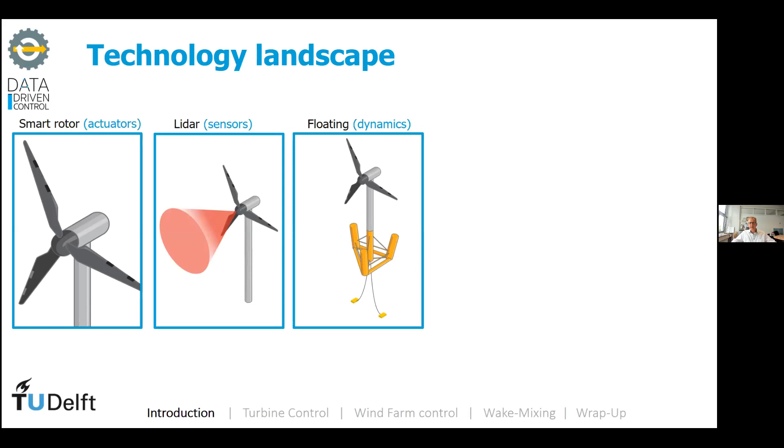Then we have floating, which I believe is the main topic of this workshop this week, and I will also place it in perspective for smart wind farms. From a control point of view, why are floating turbines so interesting? Because of the dynamics. If you install a baseline controller on a floating turbine, it will become unstable in the above rated region. So it's really interesting to study the dynamics, and maybe you can do more with it if you look at wind farms.

Wind farms, why is it interesting from a control point of view? Because of the scale and the nonlinear dynamics and the time varying conditions, and you name it. And of course, there are multiple other technologies you can also look into.

The point I would like to make with this slide is that these are technologies, and it's also the interfacing with the controller. The controller is basically saying what an actuator should do, and the controller is using sensor information. So in the case of smart rotor, you can think about distributed control algorithms. In the case of LiDAR, you can think about feed-forward control. In the case of wind farms, you really can think about distributed estimation, distributed control.

But what I also believe is that if you develop control algorithms for wind turbine applications, wind farm applications, you really have to tailor these algorithms towards the application and really use properties of the system when you design your control. And we also believe that you have to use data to design your controllers and update your controllers.

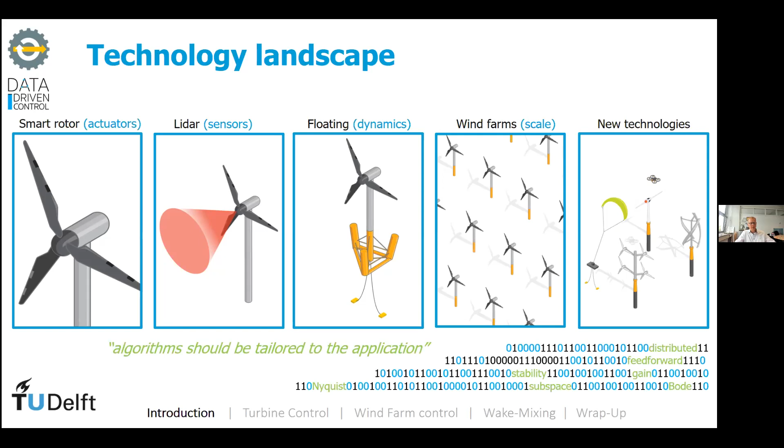So that's also the philosophy that we have in my group, is to develop data-driven controllers. So how do I design our controllers? That's basically given on this slide.

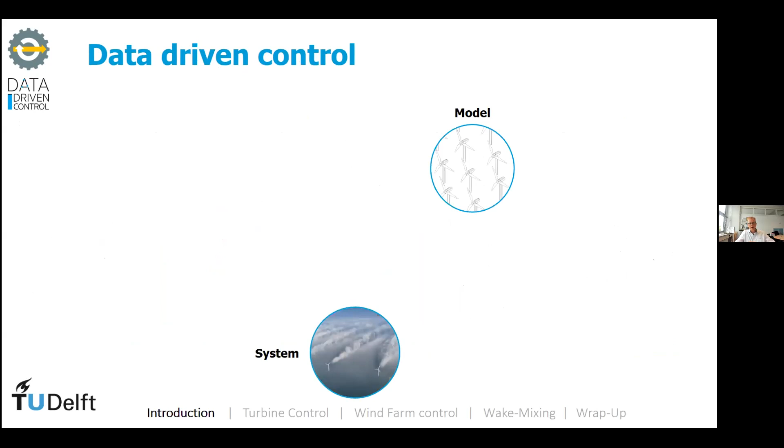We have our system, which can be a wind farm - that's something I do in this talk today. It can also be a wind turbine. And then we typically build a first principle model, which is basically given over here. But a first principle model doesn't capture all the dynamics of a real wind farm or a real wind turbine. So what we believe is that you always have to augment your model with measurements. And that can be really simple - it can be through Kalman filtering, but it can also be machine learning or whatever. But we believe that you always should merge first principles with data and not full black box modeling.

And then we have the model, and then we do controller synthesis. A controller is nothing than a computer code, right? So it's just zeros and ones. And what we try to do is always implement - that's something I'm also going to show for smart wind farms.

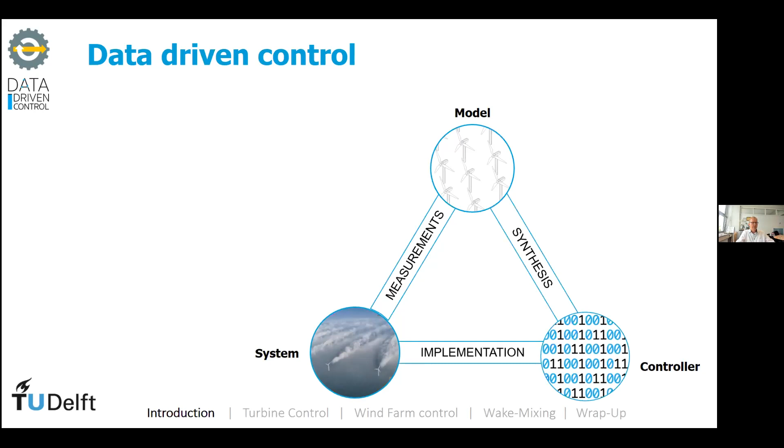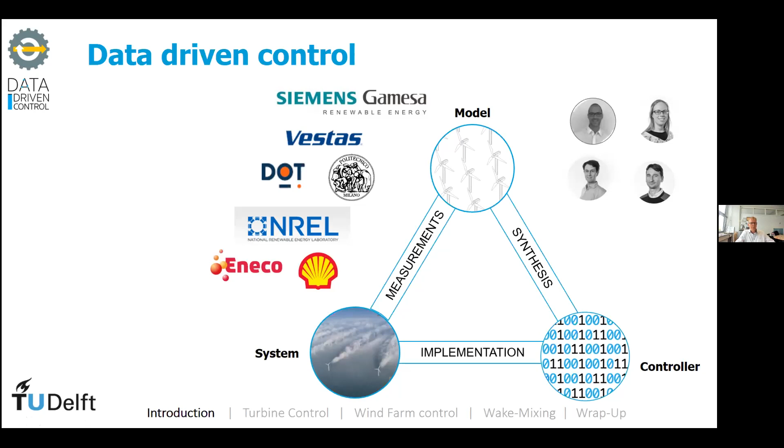So working on this cycle, that's something we do in our group, and we do that together with different companies like Siemens Gamesa, Vestas, Eneco, Shell, and also we work closely together, especially in the field of wind farm control, with NREL. And we do that with a bunch of PhD students and postdocs, which you can see over here. So the rest of the slides that I'm going to show are also made by some of them - that's a small disclaimer from my side.

So data-driven control, that's how we try to approach it. Now, data-driven control can be done in different ways. You can do this fully adaptive, that your model is updated online, but you can also do it batch-wise. You just build your system, you do modeling with SysID, system identification, then you design a controller, and then you implement, and then you're done.

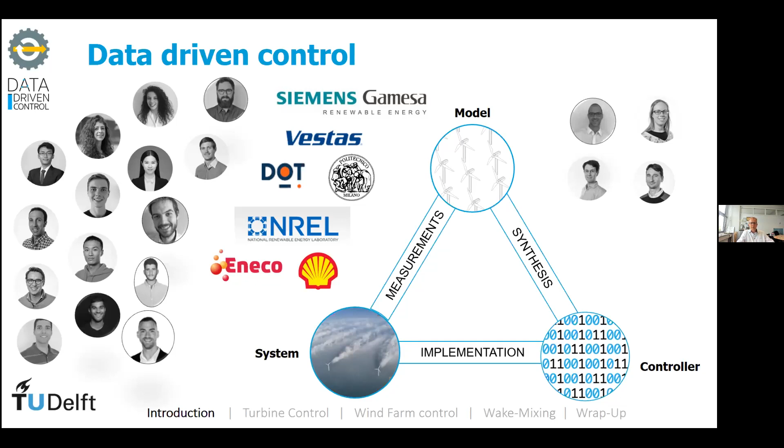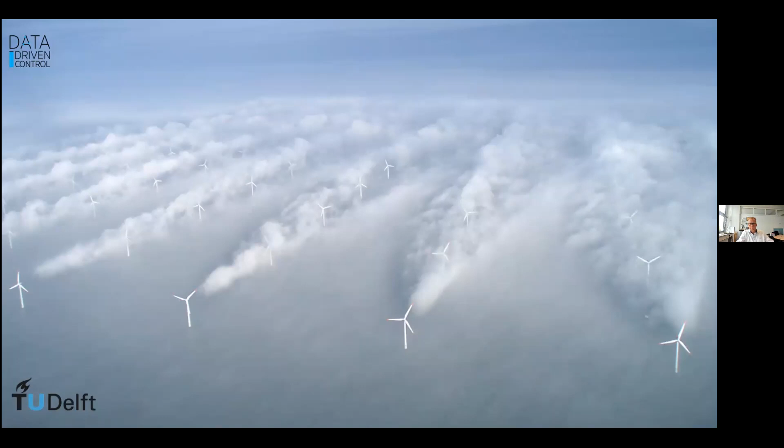So now let's go back to the wind farm, and let's try to apply data-driven control and also different control technologies on the wind farm problem. So of course, the main objective is to get more energy out of the wind farm, but also taking into account that we don't want to increase the loading too much on the individual turbines.

So can we do something about it? Can we not state, hey, let's try to put this turbine somewhere else, right? And of course, you have to do it for different wind directions and wind speeds, and you name it. Is that possible? For existing wind farms, no. But maybe in the future, since you only have to reposition with a diameter or so, maybe that will be possible. Think about the different floating concepts that are out there.

Still, this is of course far in the future, but think about the flexibility that you have. If you can do that, the potential is huge because you're fully, you don't have the wake effects anymore - if you can do this in a perfect way. So that's 20% higher energy yield. So that's a prediction.

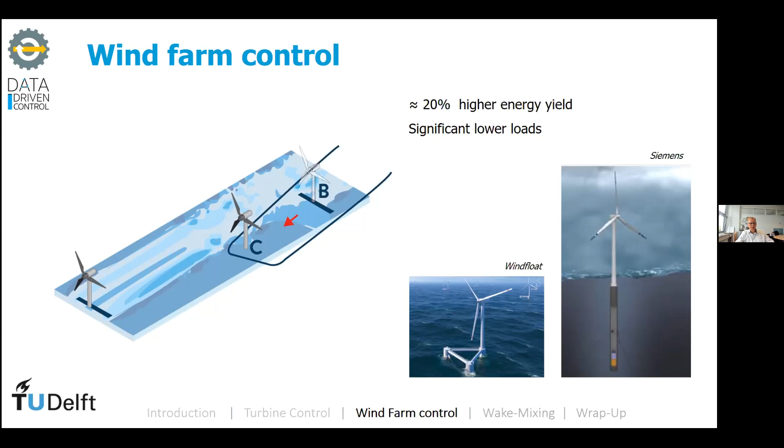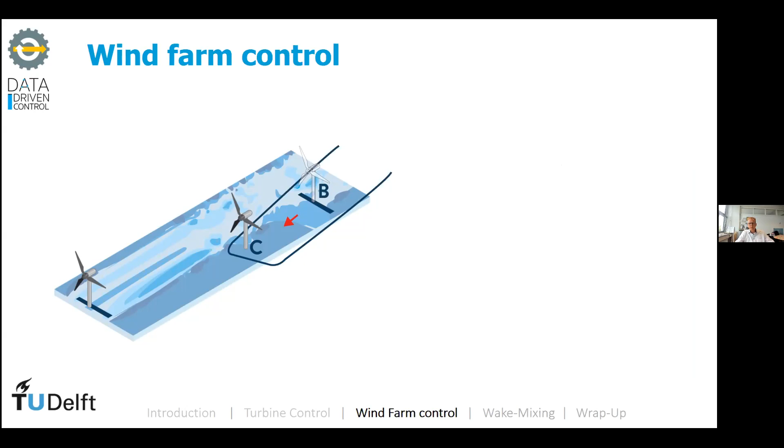But what's important here to mention is that it looks so easy, right? We see the wake in this picture, we have seen the wake on the photograph, but in reality we don't have that information. We don't have access to the flow information. So the only thing that we have is measurements, on a turbine level.

So what we have to do if we want to do wind farm control, and maybe this repositioning, you have to reconstruct the wind field. Then if you have the wind field, you have to predict what's going on, and then you have to optimize. That's the big control challenge, I would say. And then you can do repositioning, but you can also use already existing control technologies on a turbine to maximize the energy capture and or to reduce the structural loading in the wind farm.

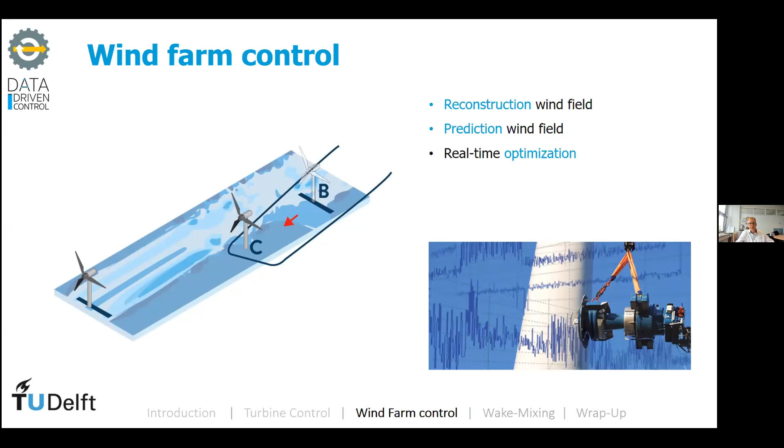Now, recent results basically show that actual induction control doesn't work. The energy that you let go is not picked up by all the other turbines. This is shown in field experiments, but also wind tunnel experiments. While if you look at really simple models, the potential is huge for induction control, high fidelity wind tunnel and field testing shows that for induction control, there is a really limited benefit.

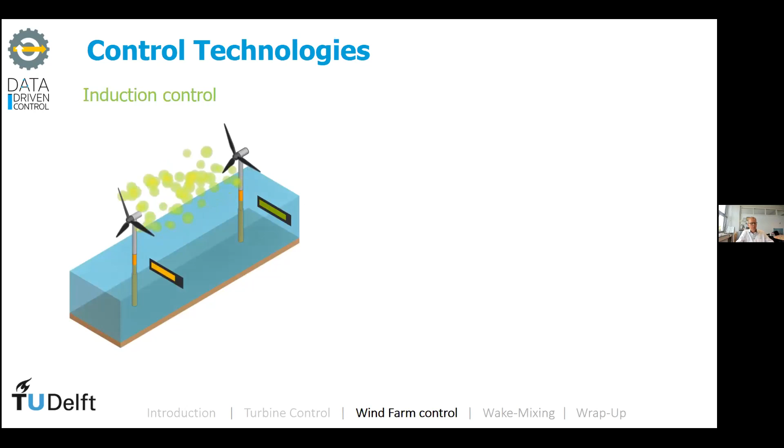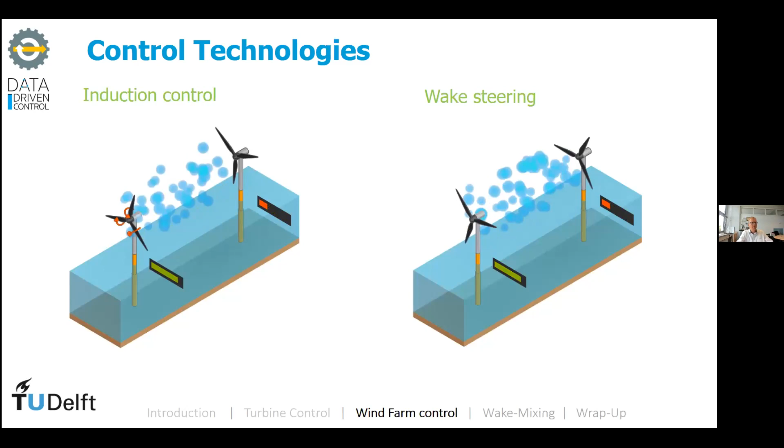This technology seems to have a lot of potential in wind tunnel experiments, high fidelity simulations, and field experiments. One example is a simulation that you see over here. This is also something you can see as a state of the art. So you see here two CFD simulations.

At the left, you see the baseline. And at the right, you see the optimized setting. The optimized setting meaning that we had a first principle model, in this case the FLORIS model, developed together with Jan-Willem. And then we optimized the optimal yaw settings. And what you nicely see is that we can do wake steering.

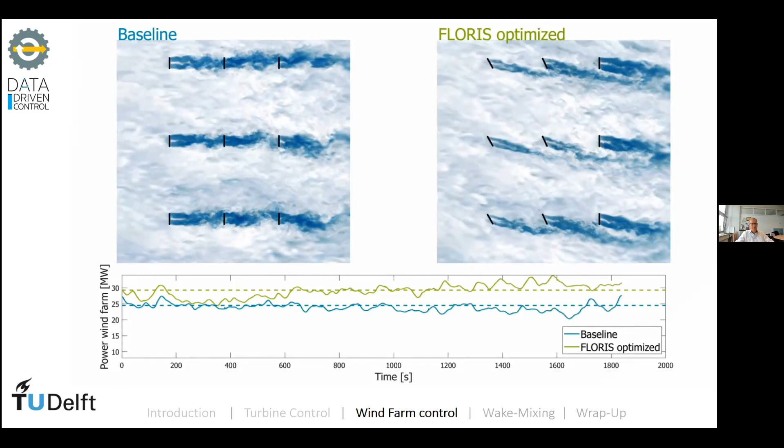Now, in the graph below, you can also see the potential and the amount of energy that you can now extract out of a wind farm. Of course, this is a high fidelity simulation, and still what you see is that the wind conditions are more or less steady, right? It's the same inflow direction, and also the turbulence intensity is more or less the same.

So we believe that if you really want to apply wake steering in a wind farm, you also have to make it more robust with respect to time varying conditions. So what we are doing, and we also did that in European projects and also now some national projects, we look at closed loop wind farm control, also taking the dynamics into account. So what do I mean with closed loop? Closed loop is looking again at the system, and then we also look at time varying conditions.

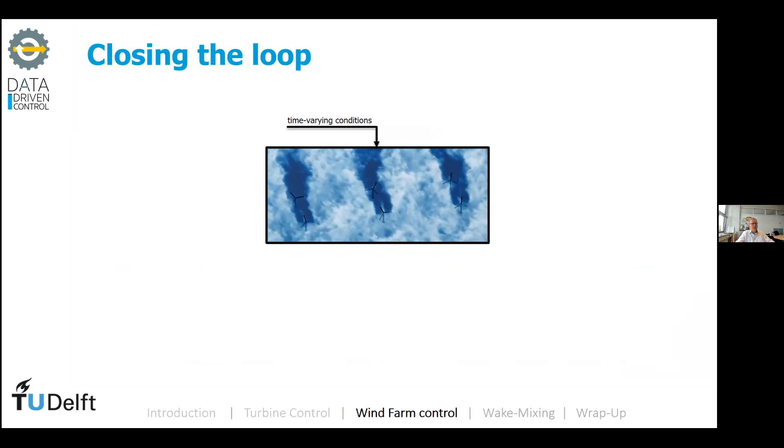So in this animation, so SOWFA simulation, you see that the wind direction is varying. And of course, we know that we have certain control inputs. So this can be induction control, wake steering, or maybe in the future repositioning.

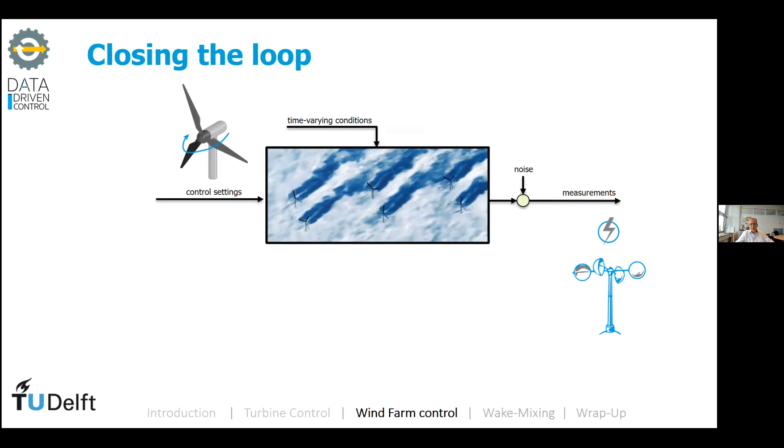Then we have measurements. And please remember that measurements are typically always corrupted by measurement noise. This can be power measurements, load measurements, or the wind vane on top of the turbine. And what we believe is that we should use this data and combine it with our internal model, which can be the FLORIS model, but it can be a 2D CFD model or another model, and adapt the model accordingly. So again, I'm coming back to our data-driven approach.

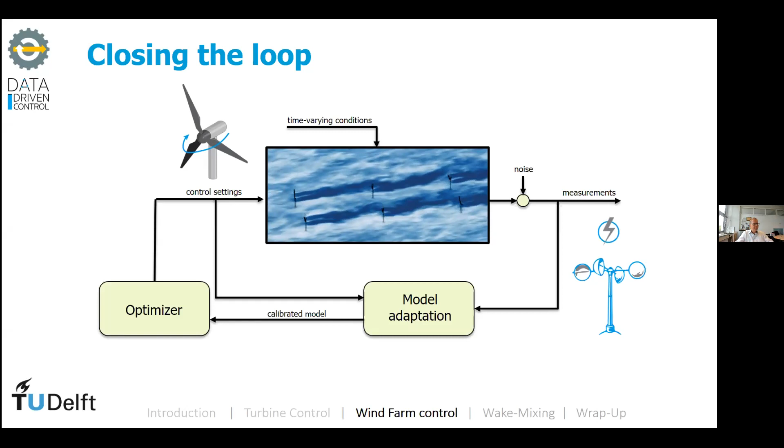This model is then fed to an optimizer, and the optimizer decides over a receding horizon what it will do. So we're basically using the MPC principle. Now, what you see here is basically then again the controller.

And the result that you see is one of our latest publications in this field, where we put the Floris model in a closed loop setting, and then we test this for time varying conditions. So that's also the work done with Bart Doekemeijer.

So yeah, that's closed loop. So what I believe is essential here is that you look into the dynamics of the wind farm. And I really believe that's the next step. And that's where we can also use control theory.

Still, I'm talking here about using steady state control inputs like yaw misalignment or induction control or repositioning, which is all extremely slow. Our recent hobby in our group is also to look at dynamic actuation. And that's basically the next topic I would like to address. And that's wake mixing. I will also try to make the link again with floating wind.

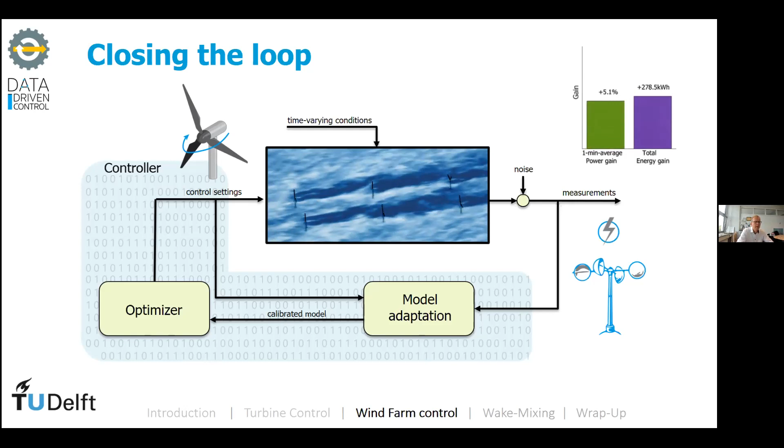So wake mixing, and then I would like to look into dynamic actuation. So what do I mean with dynamic actuation?

If you do induction control, you basically derate your turbine. So you have an offset, for instance, in your pitch, or you change your generator torque. Now let's use pitch. So you basically pitch out the blades a little bit, and then you'll lose some energy, and you hope that the downstream turbines will pick up that energy.

As stated before, in steady state, that doesn't work. But what will happen if we do this in a dynamic fashion? So what will happen if we do dynamic pitch, for instance, sinusoid on the pitch?

And think about really low frequencies, a frequency around 0.2 Strouhal for a 10 megawatt turbine. That's a frequency of 0.01 hertz, order of magnitude. So we call that the pulse. I will give an animation later on about the effect.

And that's the innovation also from our group, is to do this in a different way, is to use individual pitch control. So I didn't explain individual pitch control, but individual pitch control is typically used for load mitigation. But if you apply it in a certain way, then basically you can also try to steer the wake.

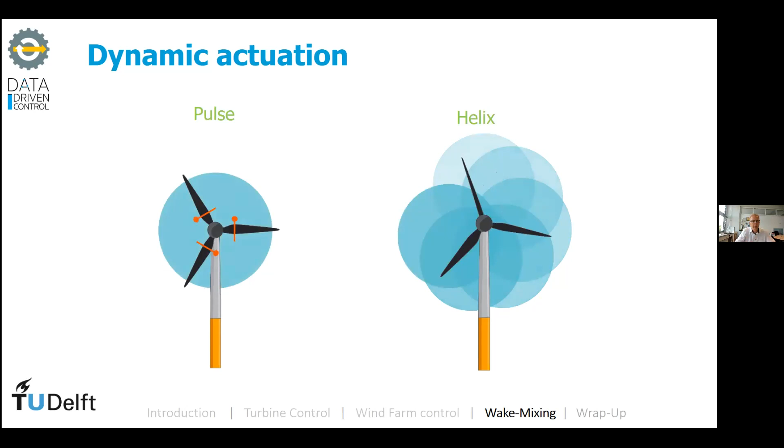And then the wake will get some kind of helix shape if you do the pitching in a certain way. So that's again explained here. So the pulse, we just put a low frequency sinusoid on the individual pitch angles. And the helix, then there are a little bit of details about individual pitch control.

You basically put a low frequency sinusoid on the tilt and yaw degree of freedom of a turbine. If you do that with the MBC transformation, you get the 1P pitching plus or minus a certain frequency. I'm not going to talk here about the details. There are some nice papers written about this.

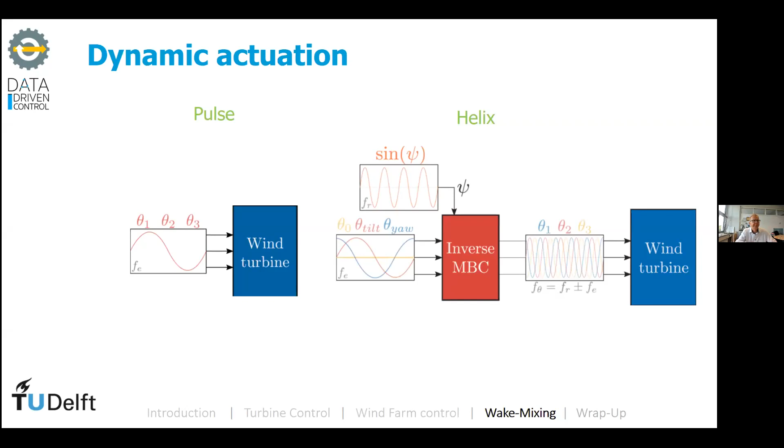So the point here is, can we do something with dynamic actuation? And then of course it's yes, because otherwise I wouldn't show you the results. So here again, a SOWFA simulation with uniform inflow, with a single turbine, 10 megawatt turbine.

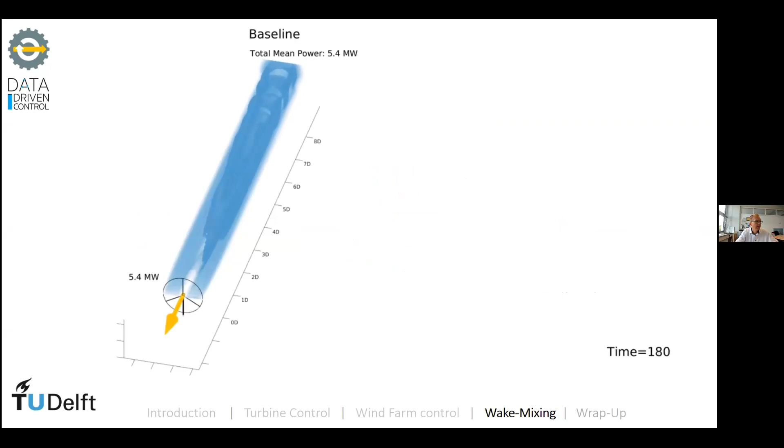And then here, the second one, you see the pulsing. So if you do pulsing, you see that you get wake mixing, and you also see that the power on the first turbine fluctuates a lot. And that makes sense because we're doing this collective pitch.

And then we also have the helix. And with the helix, we do individual pitch control. And in principle, we don't touch the collective pitch part. So that also means that the power will stay the same on this turbine. And what you nicely can see is that also the wake gets a helix shape. So that's fantastic because we also have more or less the same amount of wake mixing.

And here you see the full potential if we put a turbine in the wake. If we now have a turbine in the wake, you see that we go from 6.1, 7.2, 8.2 megawatt if we have full wake interaction. Of course, this is the perfect scenario, uniform inflow, but we have shown that also with turbulent inflow, there is a gain for this technology.

And we're now also exploring this further in national projects, and we're also going to do some field testing of the different technologies presented over here. So that's wake mixing. I know that Daniel is also going to talk in this session, but I'm going to do a spoiler alert a little bit.

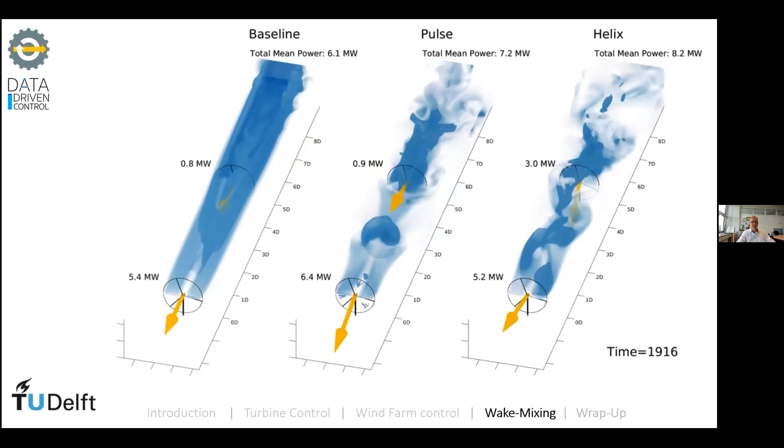What will happen? Oh, that's later on.

So part of this technology, this wake mixing, the pulse, we already tested in our own wind tunnel because we always believe it's important to also test our algorithms, either in real life or in a wind tunnel. So we use the Open Jet facility here in Delft.

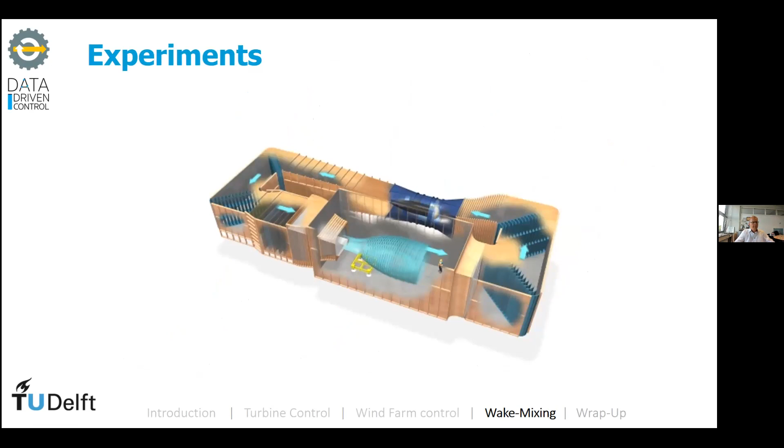Here you see a person standing in the wind tunnel, so you get an idea of the size. We did some PIV measurements, so we have this bubble seeder. We have a small turbine, and a couple of these small turbines to do wind farm studies. So we have 4 of these small turbines, diameter 60 centimeters.

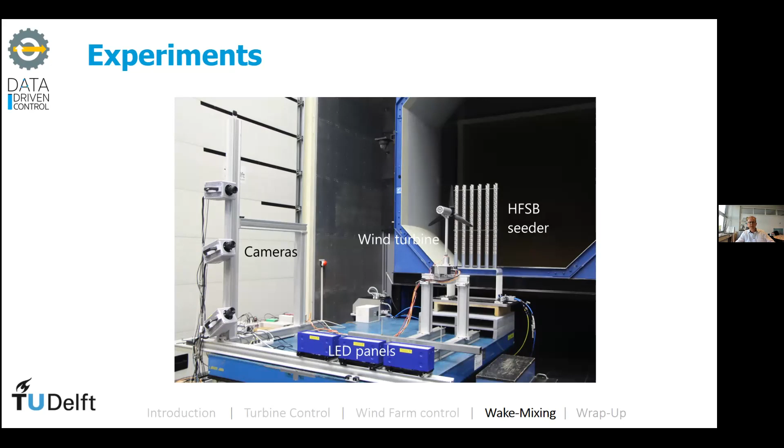And what we did is we changed the pitch, in this case only collective pitch. Now if we do that, and you just put a video recorder in your wind tunnel, you get these kind of images, and here you nicely see the pulsing, also in the wake.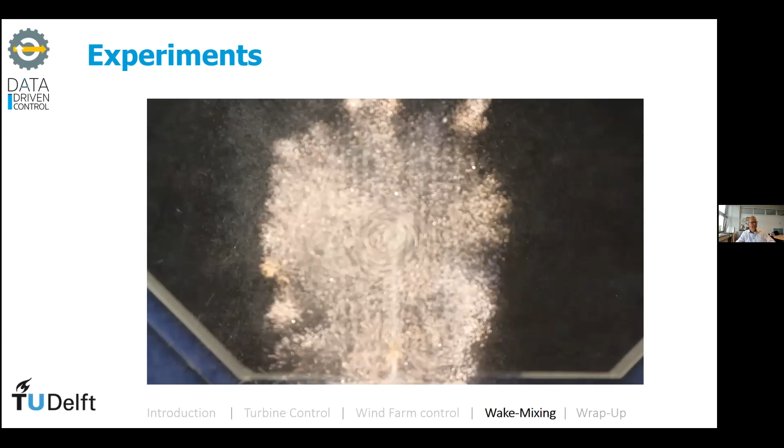And if you then do the PIV analysis, this is the work of Daan van the Broek, I forgot his last name, you get these kind of images. So what you see here is again the measured pulsing, and what you nicely see is that you get the wake mixing. So the wake mixing we have seen in high fidelity simulations, the concept, it's real.

It's also going on in wind tunnels, and we have done something similar in the wind tunnel in Milan, part of the European CL-WINDCON project. And then we also put a second turbine in the wake, and again we showed some benefits of this wake mixing. So here's a spoiler alert, I'm going to be quick here because I think I have an hour in total.

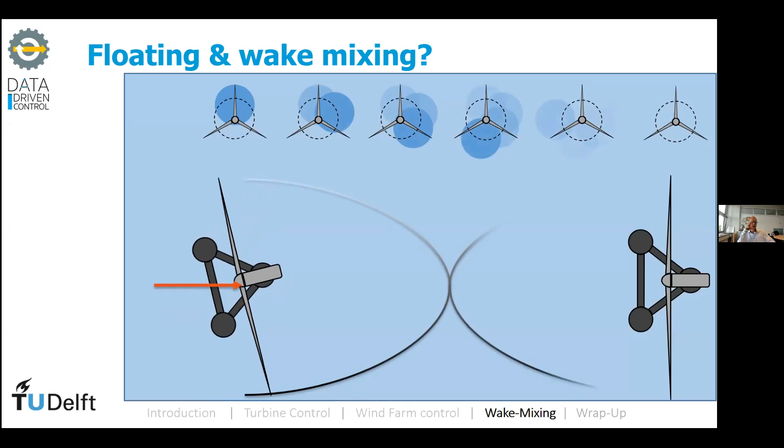So can we also use floating turbines to enhance wake mixing if you also do something with pitch? Daniel will give you the details, but if we, for instance, do it with the helix, then you can imagine if you apply the helix and also yaw and tilt moments on your rotor, you also get a natural movement of your turbine. Now you can do this for the helix, but Daniel is also going to talk about the pulse.

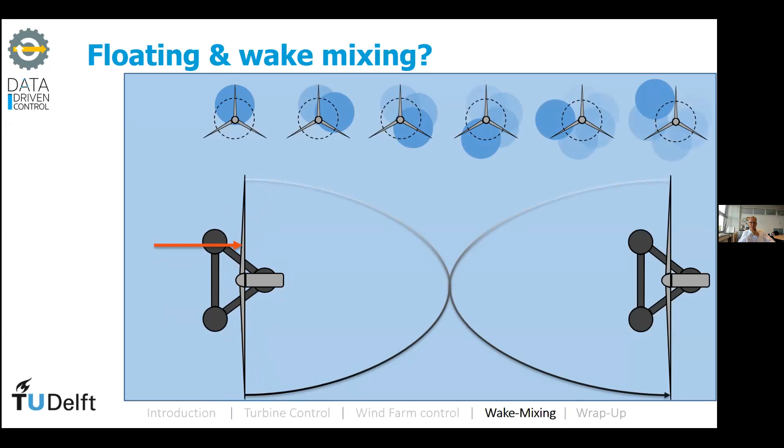You get something similar, and the main advantage would be that the amount of amplitude you need for your pitch can probably be reduced. And that's what we see over here. So similar animation as before: baseline with 2 turbines, helix 1P with 4 degrees amplitude of the pitch, and then here we see the floating implementation, where we only have 2 degrees of the pitch, and more or less the total energy gain is the same.

So what I'm saying here is that we can exploit the dynamics of a floating structure also to get a little bit of wake mixing for free. And that's something we're also now exploring, part of a European project called FLOATECH, which started earlier this year, where we look at wake mixing techniques for floating structures and also looking into wave feed forward.

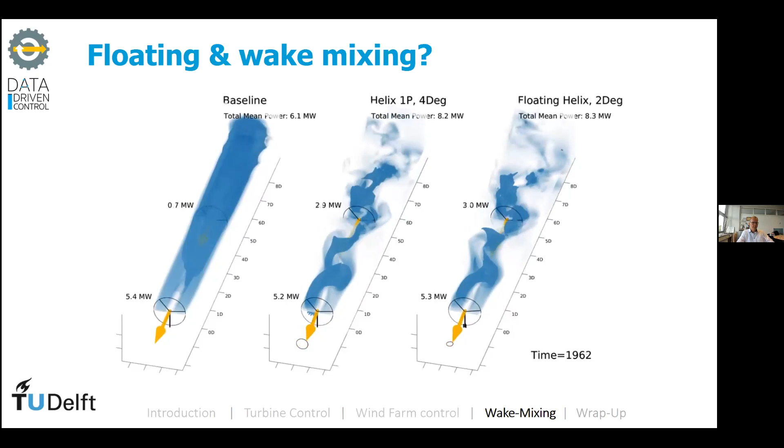So yes, the take home messages, and then we have time for questions, is data-driven control—that's the philosophy that we have, the synergy of combining data with models. So not fully black box and also not fully relying on models. I believe it's really the way forward to do control of complex systems, especially if you look at wind farms. And I also would like to say this is more than just applying machine learning, because it's really also taking the physics into account.

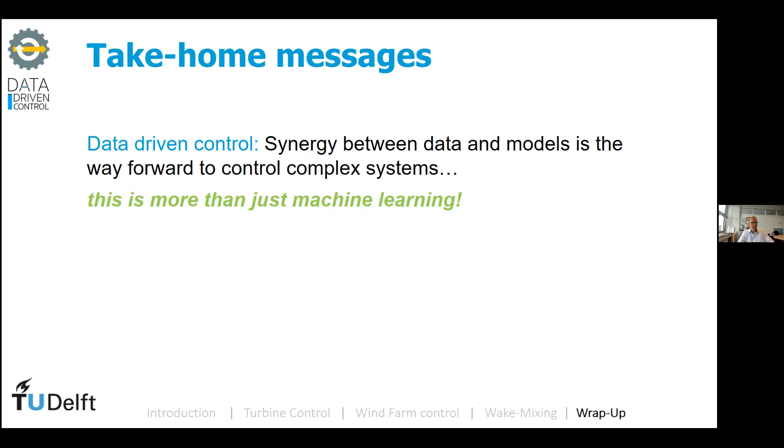And if you look at smart wind farms, I've only talked about some of the technologies we're working on. There are so many new technologies that lie ahead of us, especially this wake mixing, which is one of our favorite hobbies at the moment.

And I dare to say that wind turbine control and wind farm control is now really becoming control of high-tech systems. This is basically the summary of the work we are doing in Delft within my group. We're working on floating wind farms, where you might have these smart actuators even on the blades to do something about load mitigation.

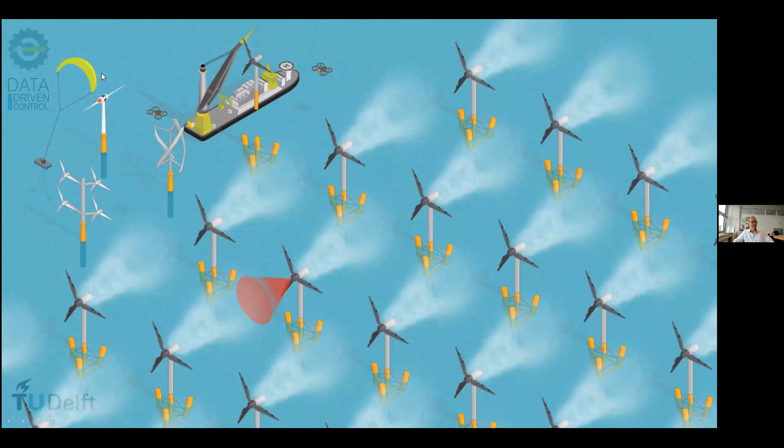You can have LiDAR. We're also looking into floating installation, and we're always interested in novel concepts, so that's why you also see that at the top left. But the most important thing that we do is we build the algorithms around it, because having an actuator, having a sensor, that is not sufficient. You have to add the knowledge, the intelligence behind the system.

And then again, we talk about the zeros and the ones and the algorithm development. That's basically the field of systems and control, and that's what we are doing. I think we will see more talks in this session related to this topic. And I believe I'm exactly within time, so thank you very much for your attention.

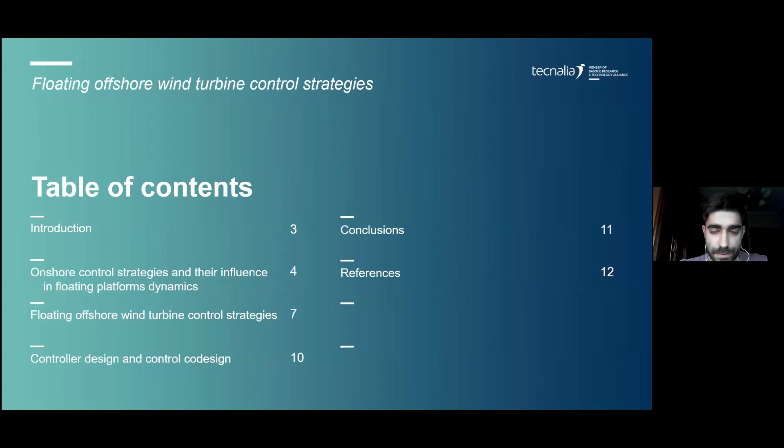What is TWIND? TWIND is a project where a consortium of 4 different entities create a network of cooperation to impulse offshore wind energy research and industry in Portugal. Thanks for the opportunity to be here presenting this topic.

Moving to the presentation core, let me explain how a wind turbine works. The control strategy describes how the turbine is programmed to approach, in a steady state, the ideal power curve. Commonly, commercial wind turbines allow variable speed and variable pitch operation. The control schemes and objectives are different for each region.

In region 1, the wind speed is too low to produce electrical energy and the turbine is kept in standby. In region 2, below rated wind speeds, the turbine starts producing, so the control objective is to maximize the output power. In this region, the blade pitch angle is usually kept constant at a value and the generator torque is controlled.

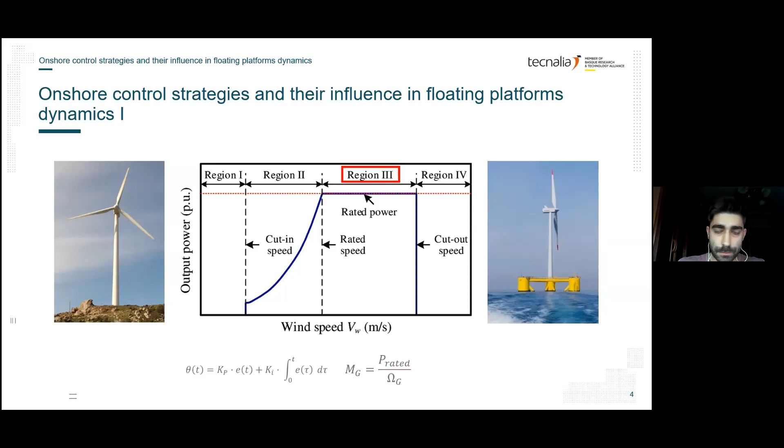In region 4, the wind speed is too high to produce energy safely, so the wind turbine is shut down. For floating systems, the challenge appears for wind speeds above rated value, precisely in region 3. The previously presented strategy generates instability when applied to a floating system operating in region 3. So there's a problem with the wind turbine controller.

A typical wind turbine employs a pitch-to-feather strategy to control the power output. When the wind speed increases, the blade pitch angle also increases to reduce the thrust force, as can be seen in the figure. In a floating system, the thrust force is a damping force for the system motion. When a change in wind speed causes a positive change in thrust force, the damping is positive. But when it's negative, negative damping is introduced to our system, increasing the motions. This negative change in thrust force can be seen when operating in region 3.

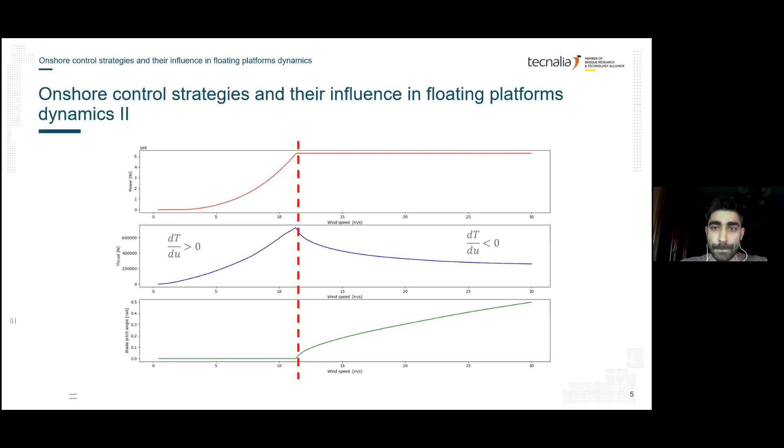So why is this a problem for the controller? Assume an increase in wind speed. The platform pitches with the wind and the aerodynamic torque increases, so the pitch angle needs to be increased to maintain power at the nominal value. In this case, the thrust force is reduced, so we are in a negative damping situation.

Now assume that the platform pitches toward the incoming wind. The only way to stabilize the platform is to create a restoring moment using the thrust force, so we need to increase the thrust force by reducing the pitch angle. Both control objectives are competing to control the pitch action in region 3. This is an undesirable phenomenon that increases the loads and reduces the power performance in floating wind turbines.

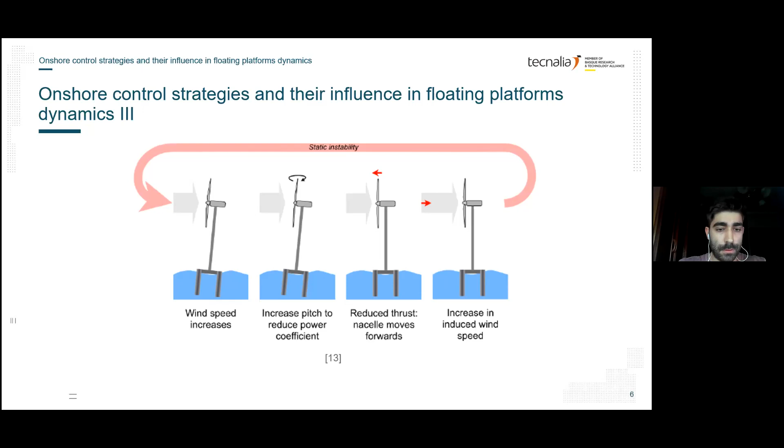So how can we control this and reduce loads? First, using the wind turbine control. Different complexity level controllers can be designed to solve this.

In a first level, we can use the same SISO control that keeps the basic control structure. The difference between this and the previous explained control is at the tuning of the control gains. This reduces the controller bandwidth below the platform pitch natural frequency. A gain scheduling method is proposed because the influence of the instability is critical only in certain operating points.

However, reducing the control gains leads to higher variation on the controlled variable. For example, higher variation in generator speed will increase fatigue loads on the drivetrain.

If we add additional sensors, a better control performance can be obtained. For example, we can add the tower top acceleration to the controller to reduce the influence of the pitch motion.

If we add extra actuators, a decoupling of the generator speed control can be done. The main advantage of this is that the aerodynamic thrust is not directly affected by the controller.

And then finally, advanced control methods based on models such as LQ approach, H-infinity, or model predictive control have demonstrated several advantages. This kind of controller has been used to avoid or at least reduce the instability and to reduce loads.

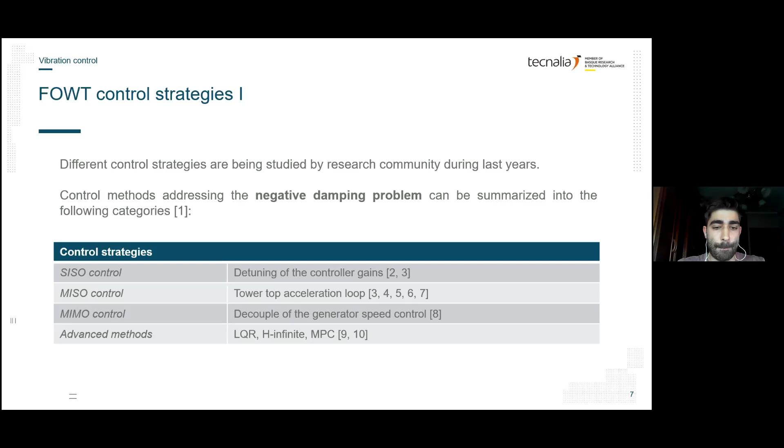Other controllers that we can use are the individual pitch control that allow us to control each of the blades independently. This has demonstrated that it solves the stability problem and reduces loads.

Another option is to use pitch to stall strategy instead of pitch to feather, that inherently eliminates the negative damping due to the blade geometry configuration that increases the thrust force for each wind speed, as can be seen in the figures.

Finally, artificial intelligence methods are being developed for floating offshore wind turbine control. Apart from stabilizing the platform, these strategies allow us to reduce wind turbine structural loads.

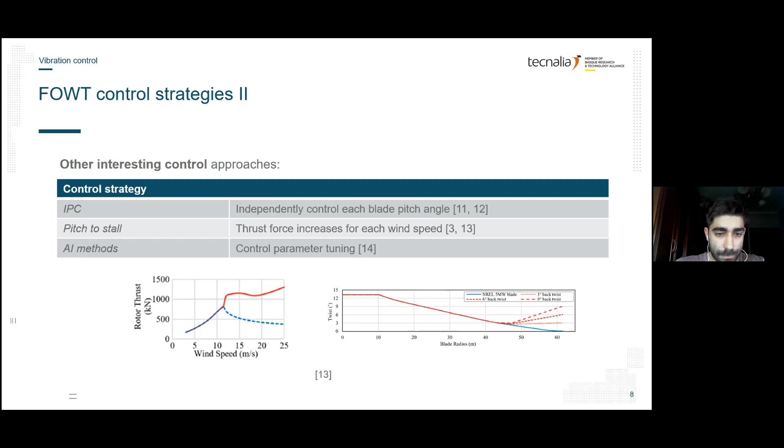The previously presented control strategies are capable of reducing the wind loads and controlling wind turbine response. However, they present some drawbacks. First, the loads reduction is limited. Second, they have a higher usage of the actuators. And third, they would lead to power fluctuation. So this means that a compromise between load reduction and power performance is needed.

If we change the approach and use structural devices, this will allow us to reduce the wind turbine vibration. These methods are divided into 4 categories: passive, active, hybrid, and semi-active methods. Passive control devices do not input any energy into the system from the controller, and the control forces are generated using the structural motion of the system.

Different energy dissipation devices are proposed in the literature and installed in wind turbines. For example, tuned mass dampers located in the wind turbine nacelle. The key to designing one of these, like the TMD in the figure, is to tune its frequency to the frequency of the motion of the main structure we want to reduce. So the device will resonate out of phase with the main structure, dissipating energy.

Active control devices can effectively reduce the structural vibration. However, they use the same concept, but require external power to input energy, which makes them not applicable when there is a power failure. Hybrid devices combine the passive and active systems. The passive control achieves part of the control goal, so less energy is transferred to the active system and less external power is needed. Semi-active devices are similar to the passive devices, but we can change some of the system characteristics, such as the stiffness or the damping ratio, to achieve a higher energy dissipation than a simple passive device.

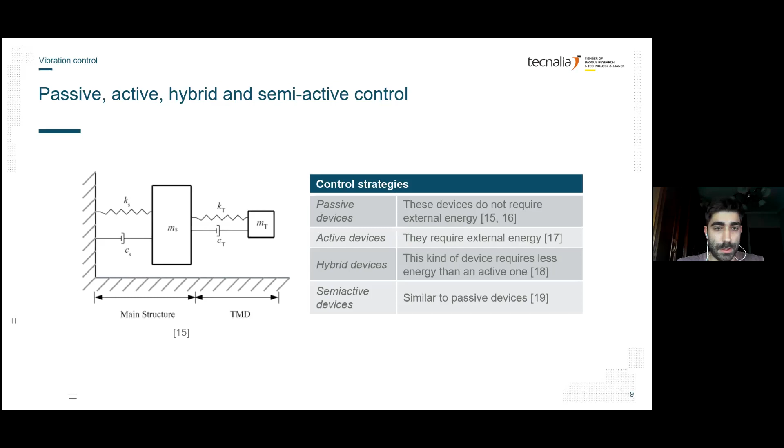With the previous slides, we have finished the different controllers for wind turbine vibration reduction. All of them follow a sequential design process, where first the wind turbine is adapted from an onshore wind turbine model. Then the substructure is designed based on wind turbine and tower characteristics. Next, the moorings are designed, and finally the system control is designed and tuned to fit the system dynamics.

So what if we optimize all together? This is what the control co-design methodology does. If this methodology is applied for the early design steps, an optimized design would be achieved for any subsystem we decide. With this, a reduction of cost is expected.

Each of the previously mentioned control strategies or approaches will lead to different optimal designs, and different projects are now being done using this kind of methodology. For example, those funded by the US Energy Department through the ARPA-E agency in the Atlantis program. So this is a really interesting field to work on with many possibilities.

Some conclusions that can be highlighted are two different approaches can be followed to reduce vibration in floating offshore wind turbines: the wind turbine control or adding a structural device.

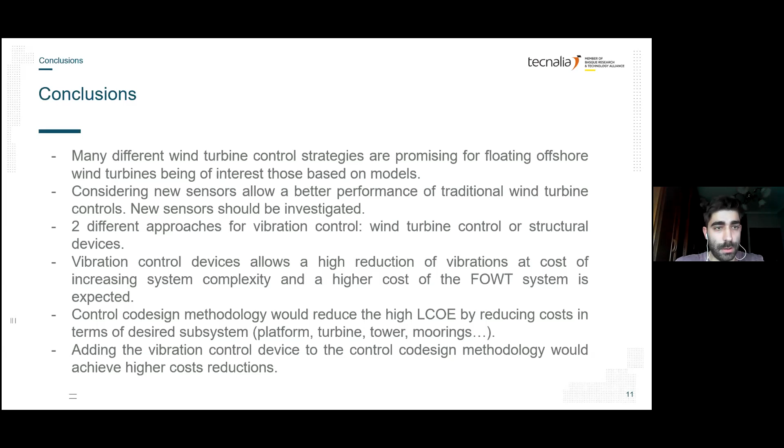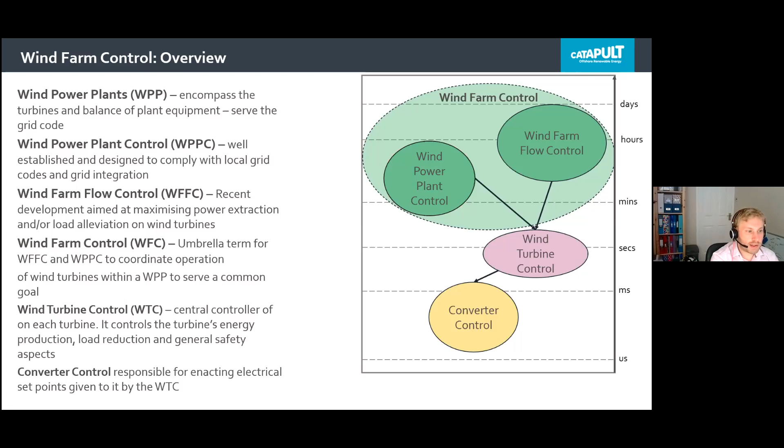So starting with wind power plant control, as I mentioned before, this is mostly aimed at grid code requirements. Grid code details all the technical requirements that must be complied with in order to connect to or use the grid. This includes mandatory ancillary services such as limited frequency and reactive power support, but also fault ride-through capabilities.

It also manages the electricity market commitments. So energy generators have to bid into different energy markets to sell their electricity. These range from very long term, which generally isn't used for offshore wind, to relatively short term. And any bid that generators make into these markets, they need to comply to.

This is more to do with power management. So the wind power plant control has to coordinate how much power is given, how much power is produced by each of the turbines within the farm.

And then finally, there's also an ancillary service market. This is in addition to the power market, generators can bid into a market to provide additional services to the grid in order to stabilize the grid and allow customers to receive a stable and secure supply.

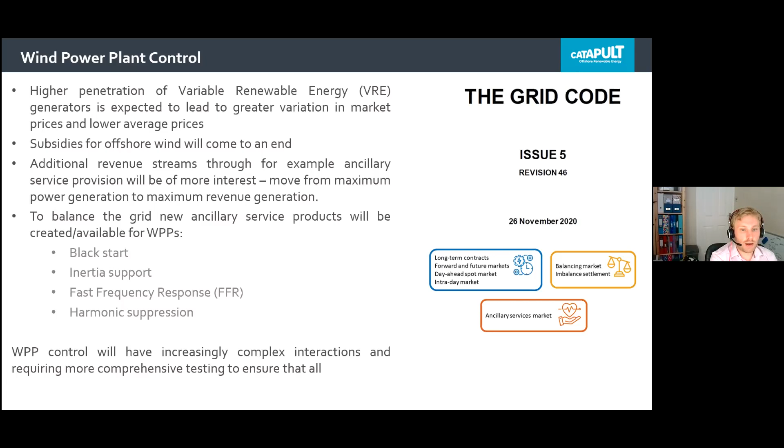With all of this, wind power plant control will have increasingly complex interactions with the wind farm and different levels of control. So it'll become more important to have comprehensive testing to ensure that this, along with the other generators within its local vicinity, behaves as expected. So I'll now pass you on to Ampea to give a high-level overview of wind farm flow control.

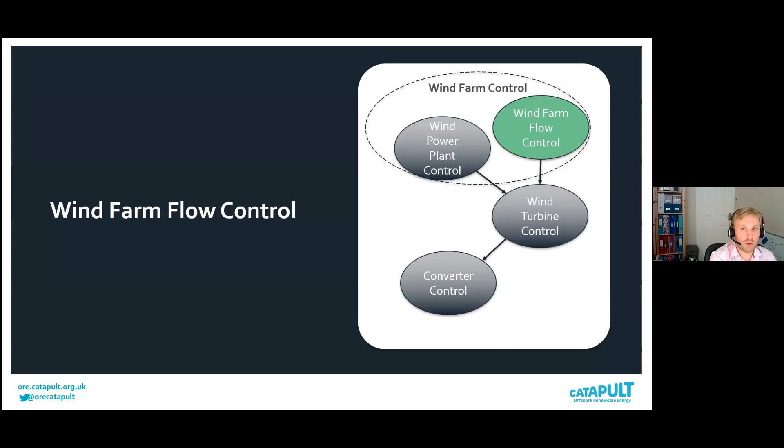Okay, thank you, Michael. So basically, for most of the things I'm going to discuss, I think Jan-Willem and Javier have touched on some of these aspects, so I will go through some of them slightly a little quicker, so that it's not too repetitive.

But wind farm flow control is one of the control techniques, or rather a group of control techniques which aim to optimize the power from a wind farm perspective, and also reduce load from a wind farm perspective rather than individual turbines' perspectives. So the wind farm flow control basically coordinates between different wind turbines to achieve this control goal.

So there are quite a range of different techniques which can be applied to do this. There's the axial induction control, there's wake steering, wake mixing, and also for things like floating offshore, potentially we can reposition turbines. So the whole point of wind farm flow control is that when the wind goes through a wind turbine, there are some downstream effects, and essentially these reduce the power or energy available to some of the turbines downstream. Also, the increased turbulence can increase loads on some of the turbine components.

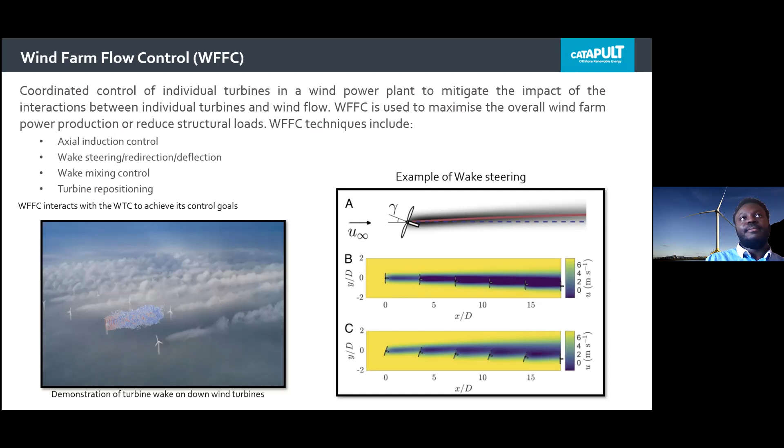So the wind turbine controller in itself doesn't actually do all the control by themselves. They interact with dynamic component controllers. So within the wind turbine, there will be subsystem controllers for the pitch control, for the yaw control, and also for converter control.

So the point of the wind turbine controller is to look from a high level, control the power production, control starts, stops, events, and also make sure that during the power production stage there is optimization in terms of optimized power capture through both speed and torque control.

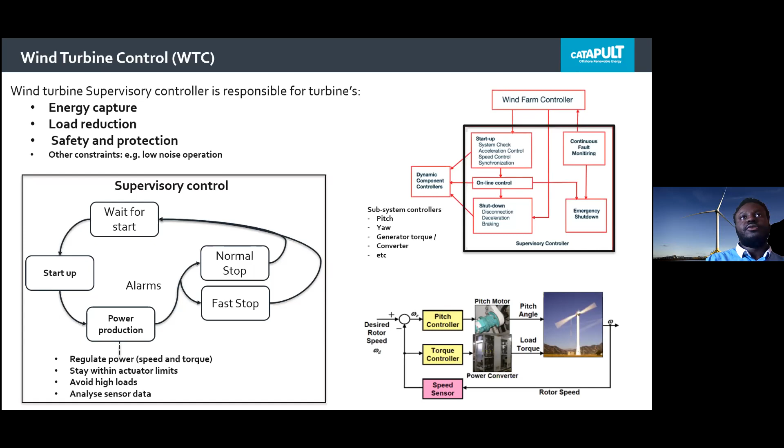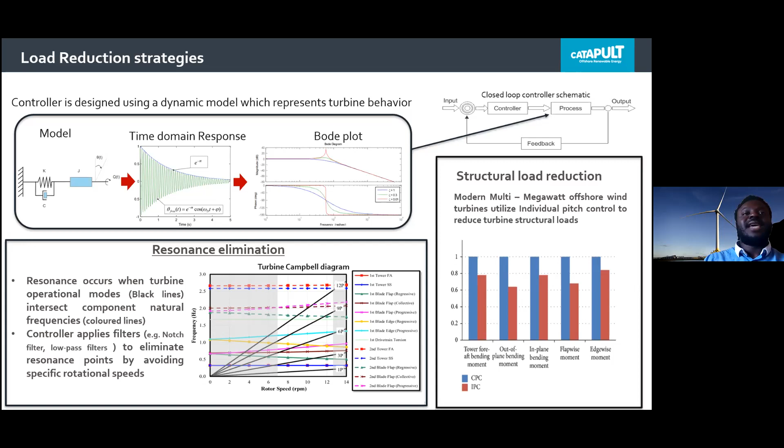In region 1, whilst the turbine hasn't reached rated speed, we want to extract as much power as possible. Whereas in region 3, we cap how much power we want to extract at the rated speed. This is done using a range of different controller algorithms. Because of time, I'm going to skip the detail, but Javier mentioned a bit about the PID controller, which is the most popular controller technique employed, though there are other advanced controllers available which are also being researched.

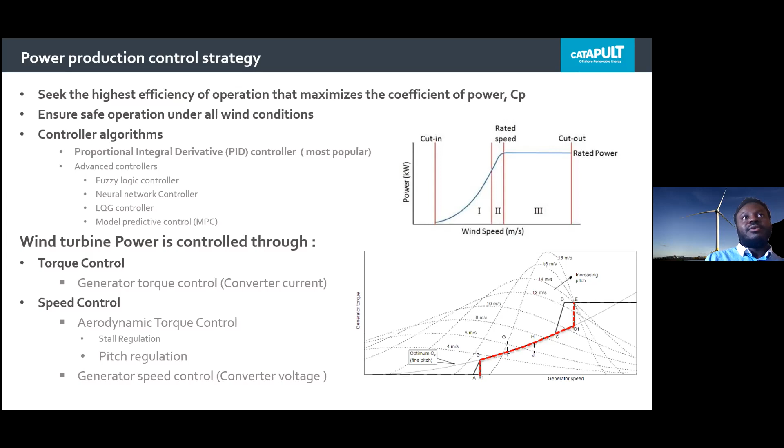The key things that the turbine tries to control is the torque, and it also tries to control the pitch angle, which in turn also controls the speed. In addition to this, speed control and torque control can also be achieved with the converter control. Michael will talk a little bit more about converter control.

So very quickly, just to wrap up, the last stage within the wind farm control segments is the converter control. This is much faster acting, generally within microseconds to milliseconds. Within modern wind turbines, there are two converters: one is the drive side, which controls the turbine generator, and the other is the grid side, which interacts with the power grid. The main purpose of the converter is to enact what the wind turbine control tells it to do, or what it desires to do.

On the drive side, that is in terms of controlling the torque or speed of the generator to ensure that it's tracking the maximum power point, or to achieve load reductions by fluctuating the amount of power extracted from the turbine. On the grid side, it's mostly about ensuring that the right amount of reactive power is produced to support grid voltage, or to increase or decrease temporarily the power output.

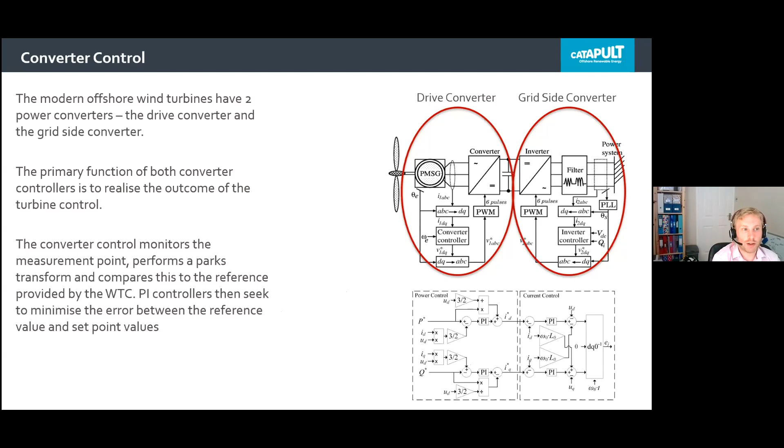More modern research is currently looking at replacing this kind of control with a virtual synchronous machine to improve the inertia within the grid and help maintain a more stable frequency, allowing more variable renewable energy sources to connect. So very quickly in conclusion, wind farm control is an umbrella term for wind power plant control and wind farm flow control. While power plant control has been around for some time, farm flow control is slightly newer and is about maximizing power output or load alleviation.

Both wind farm flow control and power plant control feed signals to the individual turbine controller, which actually enacts the desired set points. The wind turbine control is responsible for energy production, load reduction, and safety of the individual turbines. Wind turbine control is a supervisory control which interacts with the subsystem controllers such as pitch, yaw, or the converter, while the converter is responsible for realizing the voltage and current, real and reactive power set points determined by the wind turbine controller. Okay, so thank you very much for your attention, and apologies for running slightly over.

So in the next 15 minutes or so, I'm going to be talking about enhanced wake mixing, something we've already heard about from Jan-Willem. But now we're looking at floating offshore wind turbines, and then also with the idea of controls co-design in combination with this offshore floating wind turbine, how we can use this for optimization for wake mixing.

So for this presentation, I'll first quickly reintroduce the wake mixing strategies. We've already seen a lot of it during Jan-Willem's talk, so that makes my presentation a little bit shorter. Then we'll go into a little bit more detail. So what happens when we apply these methods on a floating offshore wind turbine? What kind of motions do we get? Is this what can we expect from our system? Then we'll showcase some preliminary results based on some case studies we did for different wake mixing strategies. And then finally, rounding up the presentation, I will talk about future work and the scientific prospects based on the results we saw in the case study.

And then we will specifically aim again at this, what I call the co-design triangle. That will become clear at the end of the presentation.

But first, for those who might have just tuned in or maybe missed it from Jan-Willem's presentation, typically speaking, we have what we call wake mixing strategies, which are strategies by which we actuate the blades of the turbine to cause wake mixing. With wake mixing, we can increase power generation of turbines downstream by having the wake re-energized at an earlier stage. Typically we discern between two different methods, the pulse and the helix. With the pulse, we pitch the blades simultaneously in a sinusoidal manner. And with the helix, we also are pitching the blades, but then individually with a certain phase offset.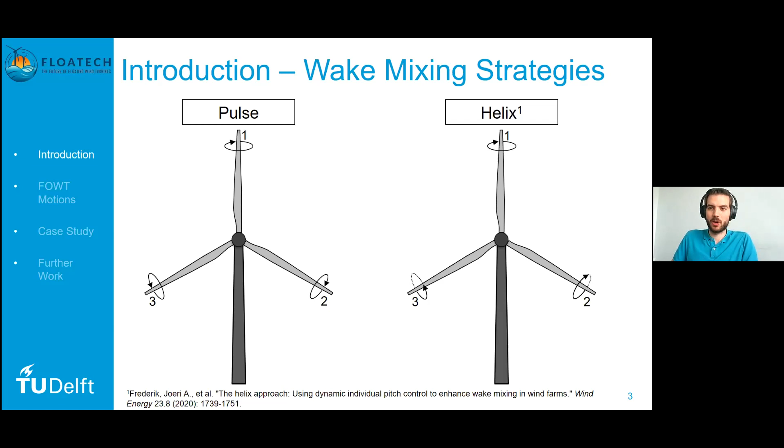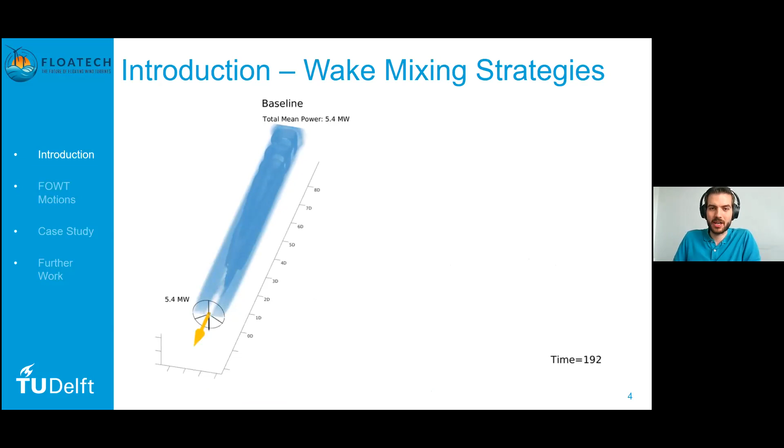The results on the wake are shown in this movie, which is probably, again, not really new for most of us, but I'll quickly go over it. So here on the left, we have a turbine running baseline, so that's just greedy power settings. Then again, we have a turbine running the pulse, and there you can clearly already see this pulsing effect in the wake. Then at a certain point, we will add a turbine doing the helix. Let me skip a little bit ahead. So here we have the helix, and again, we see why we call this method the helix. We see this typical helical shape in our wake appearing.

And then finally, when we add a second turbine downwind, skip ahead again, so we make the smallest possible wind farm that we can have, 2 turbines, then we can see that our second downwind turbine is producing significantly more energy with the wake mixing strategies compared to a baseline.

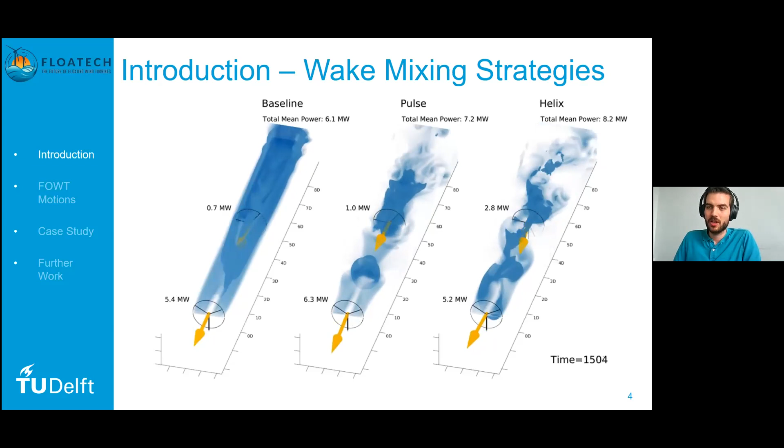So these techniques and results already exist. They have been simulated in many different programs, and there is merit to it. But the real question we're looking at is, when we are applying these wake mixing strategies, we're also varying the thrust of the turbines. We also saw a short movie in Jan-Willem's presentation of this.

For example, with the helix, our thrust force will get a lateral movement. And then, because our turbine is now floating and the platform is free to move, we can also expect some kind of pitching or rolling motion from our platform, maybe even translation motion. Is there a way we can actually use this kind of movement from our platform to maybe enhance our wake mixing further?

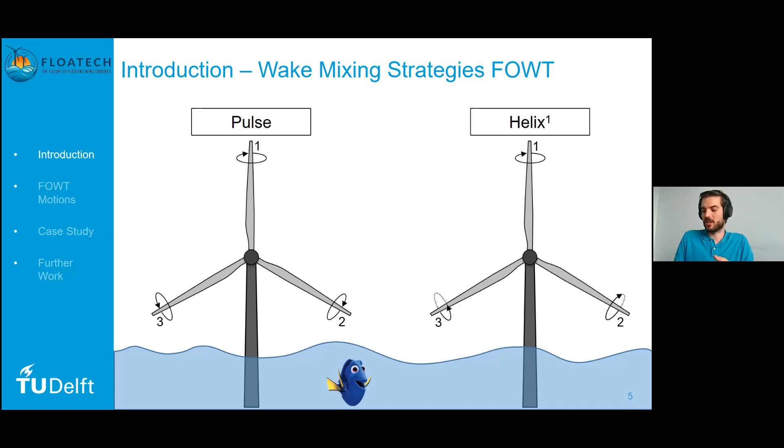To get an idea of what our platform would do when we apply the pulse or when we apply the helix, we took the DTU 10 megawatt on the triple spar platform. This is a model which has been well researched, and there exists a model of it in FAST. For a whole range of Strouhal numbers, so different frequencies of pulse and helix, we logged all the motions of our platform in steady state, and from that we extracted so-called Bode plots.

These Bode plots show, and I'm only showing the rotational motions of the platform, because the translational motion in the end turned out to be negligible in comparison to the size of the turbine, but the rotational motion turned out to be quite significant.

If we take the top left graph, if we apply the pulse with, for example, 1 degree of blade pitch, then at the ideal Strouhal number of 0.25, we can expect roughly 0.25 of platform pitching - backwards and forwards pitching of our platform. At the same time, we can also see that at this frequency we have some coupling to the yaw motion, so the yaw motion is also amplified. We also have roll motion, but this is of 2 orders of magnitude less.

So our platform, when we apply the pulse, as you would imagine, because of this varying thrust, which we also saw in Javier's presentation, our platform will start pitching backwards and forwards. If we do this in a cyclic manner, then our platform will also be pitching in a cyclic manner. Typically the pulse is applied with 2 to 4 degrees. So let's say we take the pulse at 4 degrees - our platform will be pitching with plus to minus 1 degree. So it is a motion that we can actually see on our platform.

Now, if we look at the helix, we also see something interesting happening. First of all, for the helix, as we also saw in Jan-Willem's presentation, the helix amplifies the yaw motion quite heavily. The reason the yaw motion is amplified this heavily is because it's not naturally damped by the water. Pitch and roll motion are naturally damped by the hydrodynamic forces - this is less the case for the yaw motion.

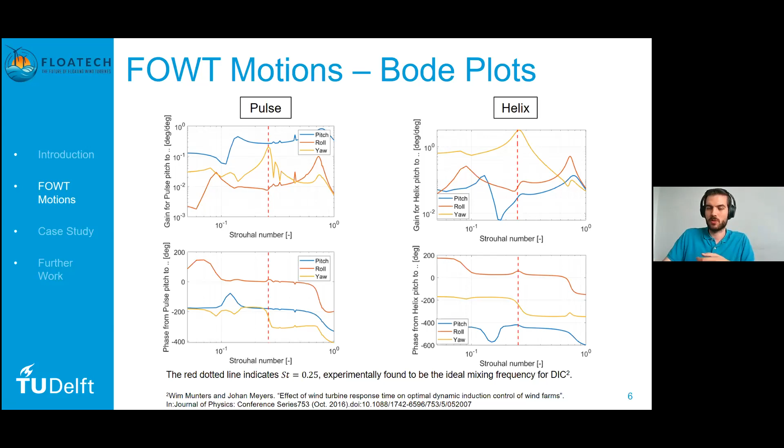So to see what kind of results we could expect in terms of wake mixing, we devised some case studies to make a comparison. These scenarios are all based on the DTU 10 megawatt on the triple spar platform. Again, this is also the platform on which we have based our Bode plots, and it's a well-researched, well-documented platform combination - I think the only turbine platform combination that exists in literature.

Nevertheless, we took - for the pulse, we took 4 scenarios. I see that I'm missing one. So for the pulse, we took 2 degrees of blade pitch without platform movement, and we also took 2 degrees of platform movement with half a degree, or 2 degrees of blade pitch with half a degree of platform movement.

Then we double the blade pitch. Oh, I see, this is complete. I made a few typos here.

So we have 4 scenarios: 2 with 2 degrees of blade pitch, 1 without, and 1 with platform movement, and also 4 degrees of blade pitch, 1 without platform movement and 1 with platform movement. The goal is to see what's the incremental increase in wake mixing, if there is any, between the various scenarios. Then for the helix, we also did something similar.

So we have the 4 degrees of blade pitch without platform movement, and then we halve the blade pitch angle, and we allow the platform to freely move. And as of now, we have prescribed, and this is important, we've prescribed the motion of the floater.

So we apply the pulse, we apply the helix, and then we tell the system, okay, yaw or pitch our turbine in this way. So there's no coupling between our floater model and the aerodynamic forces as of yet. It is something we are working towards as of now. So if we first start with looking at results for the pulse.

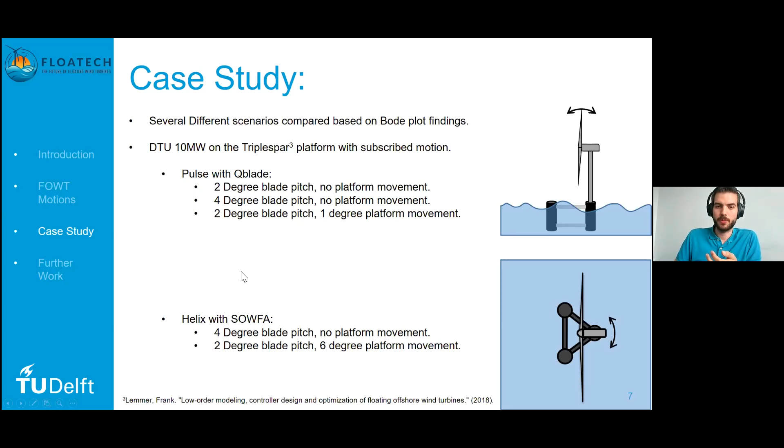For the pulse, we're now looking at a movie of a front view of the wake at a 5D distance downstream. And we chose 5D because this is a typical distance where you would want to place a second turbine.

And then we're looking at the average wind velocity over the rotor disk of any potential second turbine that we can place there. It's also plotted in real time in the graph down below. And then we're looking at average wind speed because in Q-Blade, we're not capable of placing a second turbine downwind.

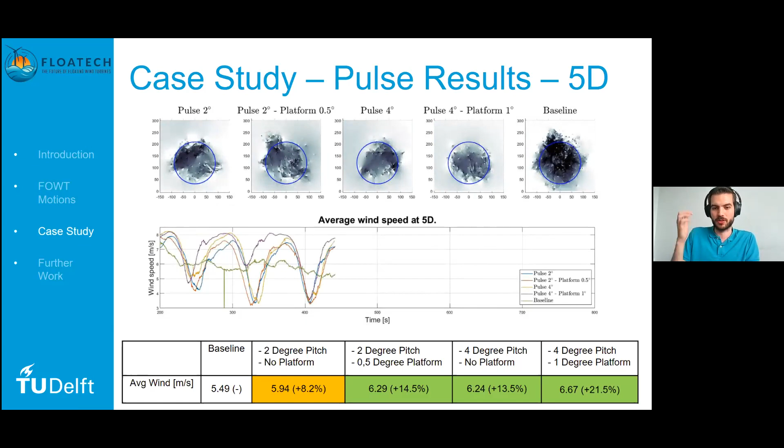So we have to get a measure of the amount of energy that we can extract. We are looking at the average wind velocity. The results are also summarized in the table below.

So here you can see that no matter what we do, if we start pulsing, then we have an increase in average wind speed across our rotor disk. This is also what we expect from literature. This is a known result.

However, which is something far more interesting, is that if we allow our platform to pitch, we get a significant improvement in the average wind velocity that a second downwind turbine would potentially feel. So this is an increase in wake mixing in our system coming purely from allowing the platform to move.

And we can also see that even for the 2 degree case, with this particular data set, allowing the platform to move is equivalent to doubling the amplitude of the blade pitch without any platform movement. So there's a significant increase in wake mixing by just allowing the platform to move.

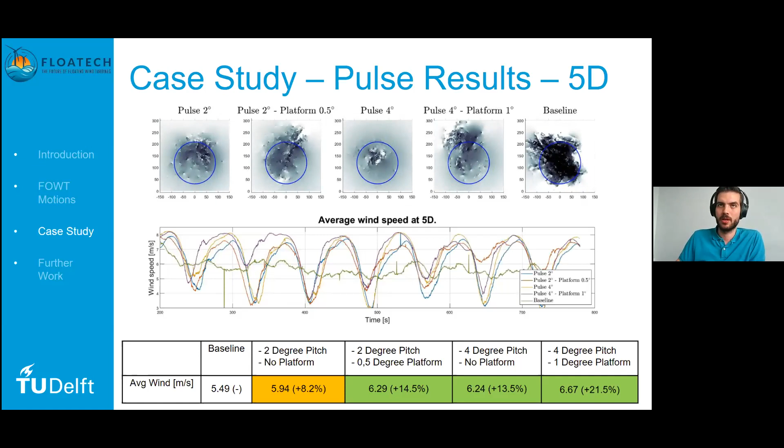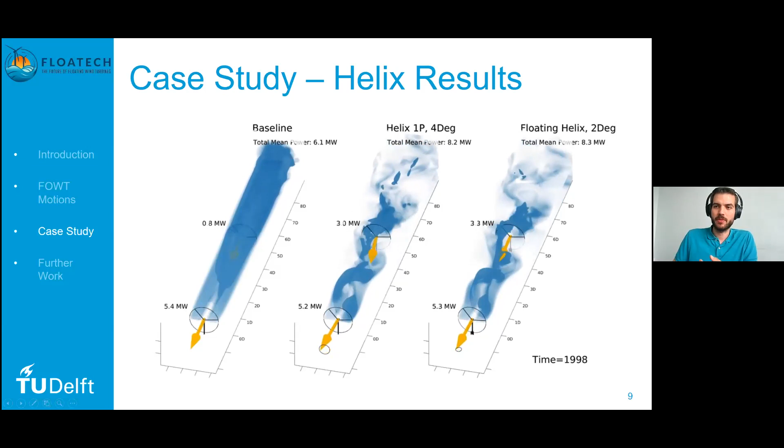So to wrap up this presentation, for now we've seen that for both the pulse and helix we have very promising results. Allowing the platform to move, again, it's a simplified scenario, does increase wake mixing. It's also interesting that the amplification of platform motion is primarily dependent on platform parameters.

So the turbine itself does not play a significant role. It does play a role, but not significant. This is also interesting from the perspective that for the helix, especially, we do not yet know the ideal mixing frequency. And then also, of course, the question will remain open, even though we can reduce half of the amplitude, what does this platform motion have for implication on the loading of our entire floating offshore wind turbine system?

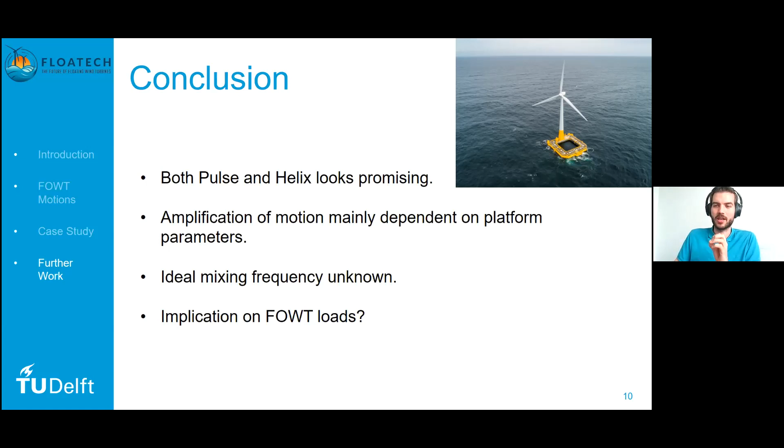And then quickly, actually, I'm slightly over time, but quickly to wrap up this presentation. So what we're ultimately working towards is, let us say we have knowledge on what kind of frequency we need to achieve wake mixing.

Is there a way that we can design our platform such that it excites exactly these frequencies with minimal pulse or helix input, so that we need minimal control action to achieve a maximum amount of wake mixing? With that minimal control action, because we have some headroom left over in our controller, is it also possible to do load minimization or even combine the three? This is something we are hoping to work towards in the upcoming years.

And with that, I would like to end my presentation. If there are any questions, I'm happy to answer them now.